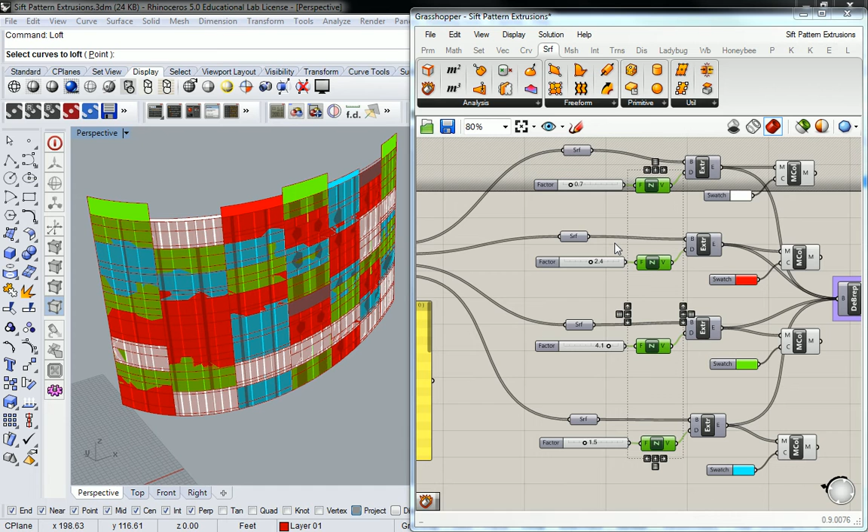All right, everyone. So our next task is going to be figuring out how do we change this angle to get it to extrude kind of outward from where it is. And most of you already sort of figured out the easy way of doing it, which is to just change the direction of the extrusion.

So this extrusion right here, we'll do just what Janet did here a second ago, and we're going to change it to unit. In my case, I'm going to do Y. It just depends which way your surface is facing. So I can just take one of these and go to each one, go down there, this goes up there.

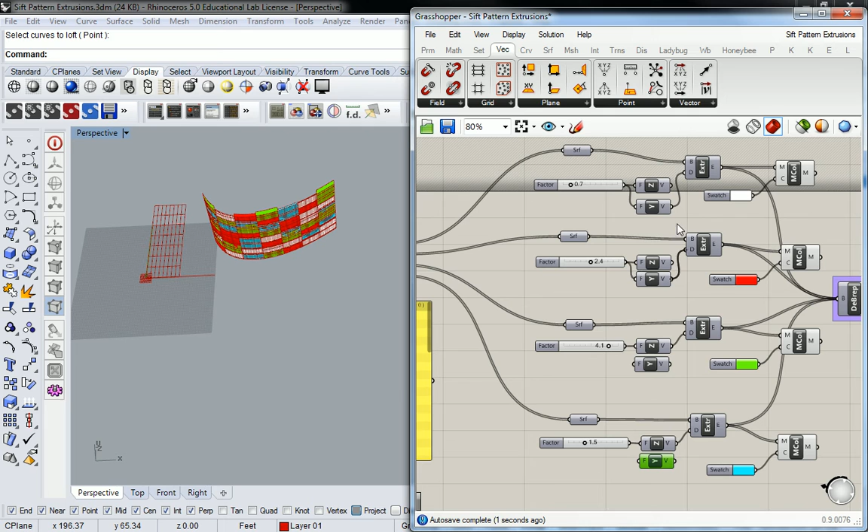Is there an easy way to replace those? This is the easiest way as far as I know. I wish I could just right-click and change it to be Y instead, but yeah. So that's Y.

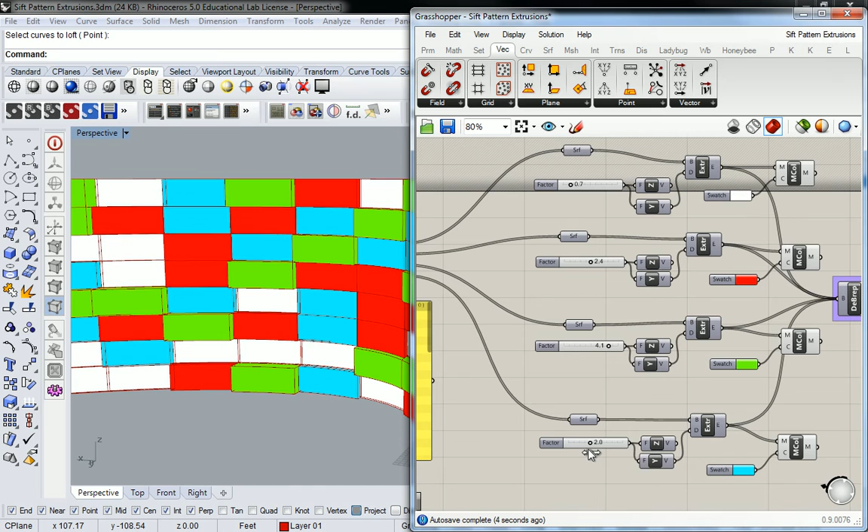And I can extrude these, make them more shallow, whatever you want to do with them. It's up to you. But the point I want to make is that while some of them are extruding kind of nicely, like I can see a pretty good amount of definition in these right here, some of them are not, like this one. It starts to taper off to be more of like a wedge shape, and that's not really what we want to do.

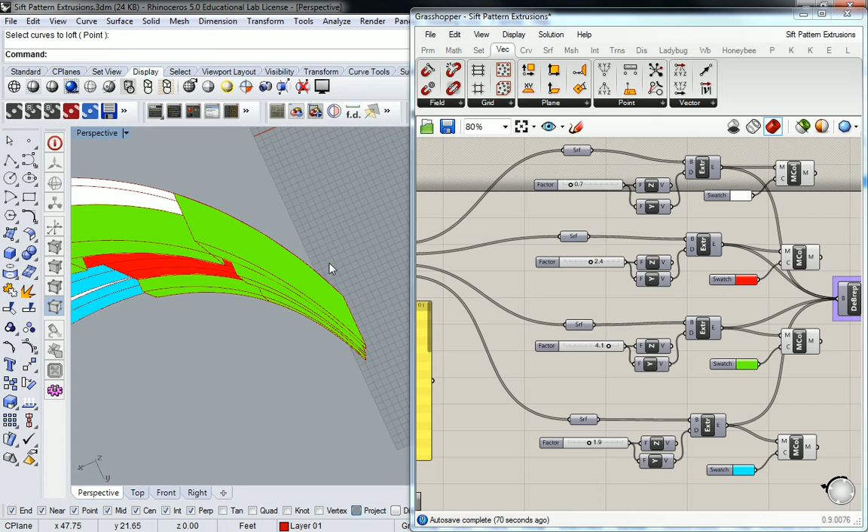Yeah. Okay, but we need to kind of rebuild it a little bit. We'll start by just using the actual surface itself in its curved form, and then we'll transition it to be a flattened form later on in the class. But let's start with just each one of these individual surfaces.

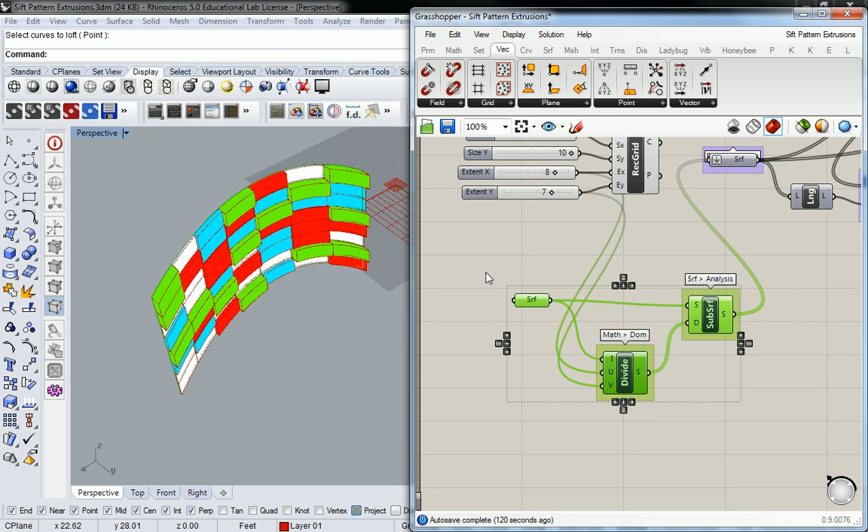We need to find the surface normal. And this was, like I mentioned, the Holy Trinity. When you're finding the surface normal, the names of the commands are not super intuitive. It's just kind of like this wiry mess of a bunch of things that you should probably just save, keep, and know. Eventually I'm going to show you how to make a custom component out of it, but I want you to practice building this a couple of times so that you really understand what's happening before we do that.

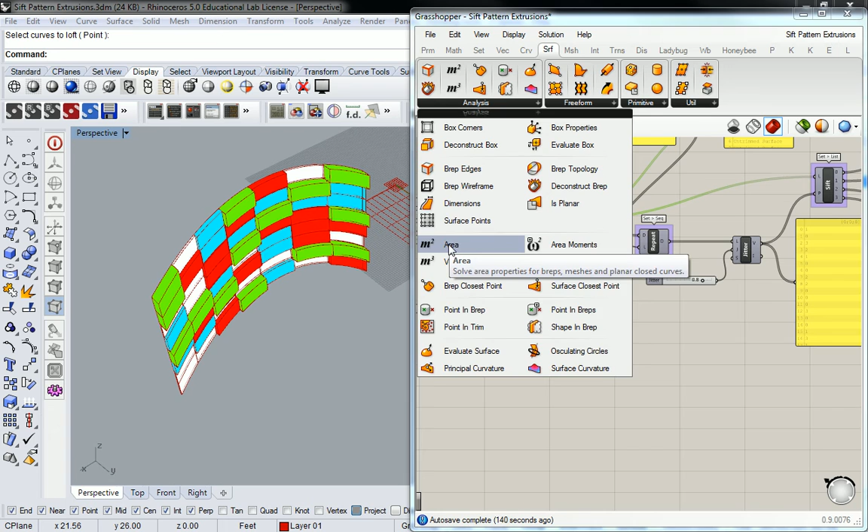Okay, let's do it together. To find a surface normal, you're going to operate off of each of the surfaces themselves. That's this one right here. You'll need to go into surface and analysis, and there are 3 components you need every time you need to do this. You're going to need area. And what area is going to do when you plug surface into that...

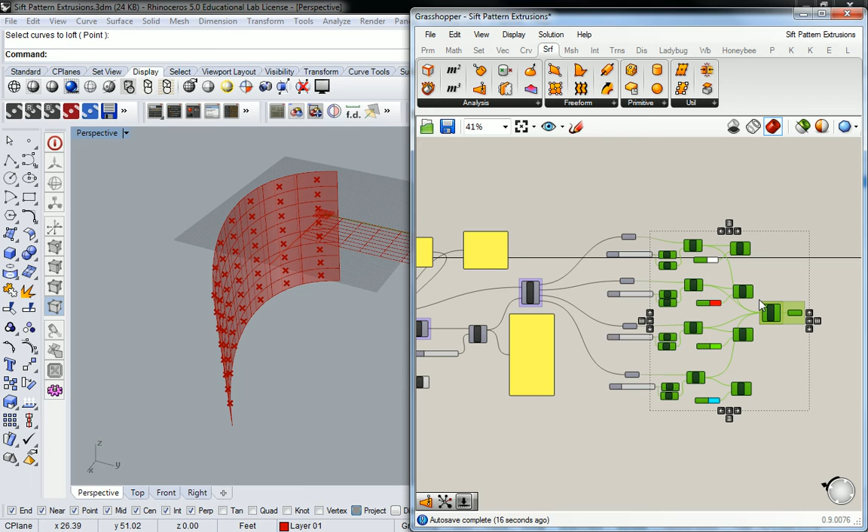Actually, let me hide these. Yeah, I'm going to hide those. Everything that's happening at the end, just hide them. I have a quick question — I didn't hear, so why did you change from unit Z to unit Y? I chose Y because X would have had everything extruding this way, and it wouldn't have been easy to see what's going on. So it's just how you make your curve.

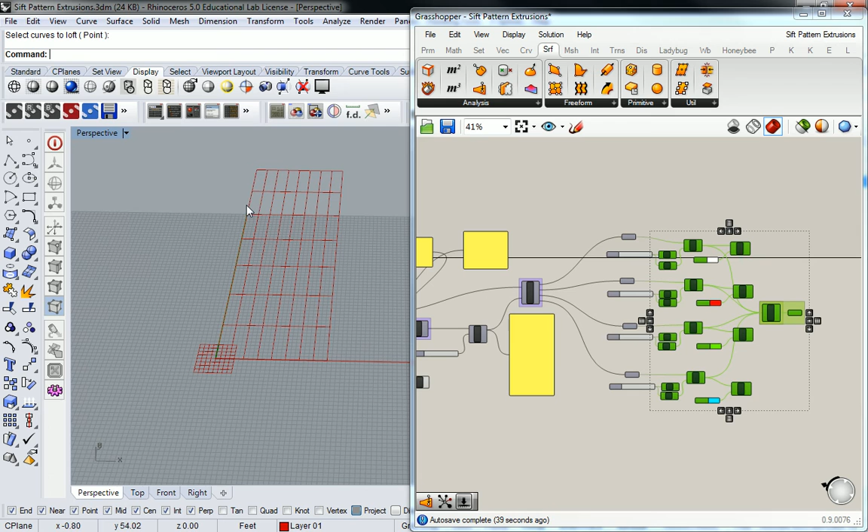Yeah, it depends which direction it's facing. Z is going to go up from the origin, X is going to go to the right, and Y is going to go 90 degrees from X. Can't say up anymore, but yeah. Does that make sense? Yeah. Can I just rotate my curve then and not have to change it? Yeah, you could do that too.

All right, so what does area do? It creates—well, its purpose is to calculate how much area there is in each of the surfaces that you plug into it. But it also calculates where the centroid is on that surface, because you need to find a centroid in order to find area sometimes, or at least it's a byproduct of finding the area. So that happens to live here.

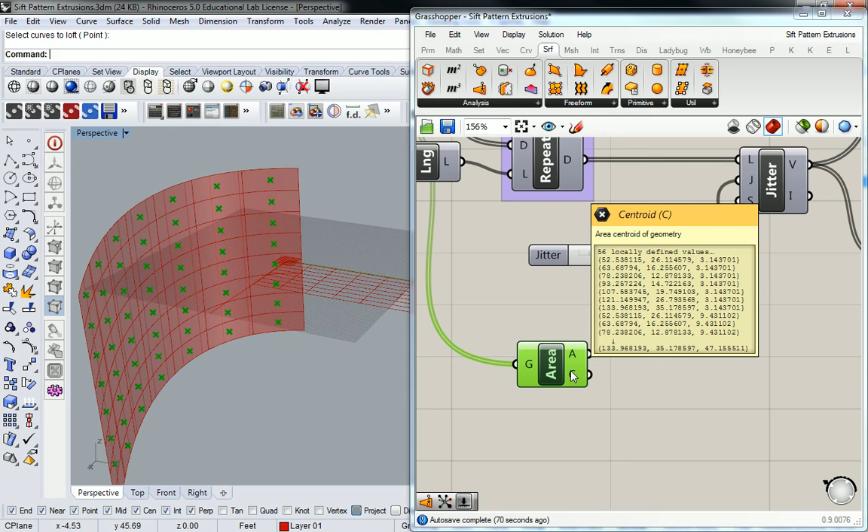I wish that there was just like a centroid command, but whatever, it's there. The other two we need are evaluate surface and surface closest point. I'm going to drop them both in here and then explain what's happening. All right, and this is the configuration I typically put them in.

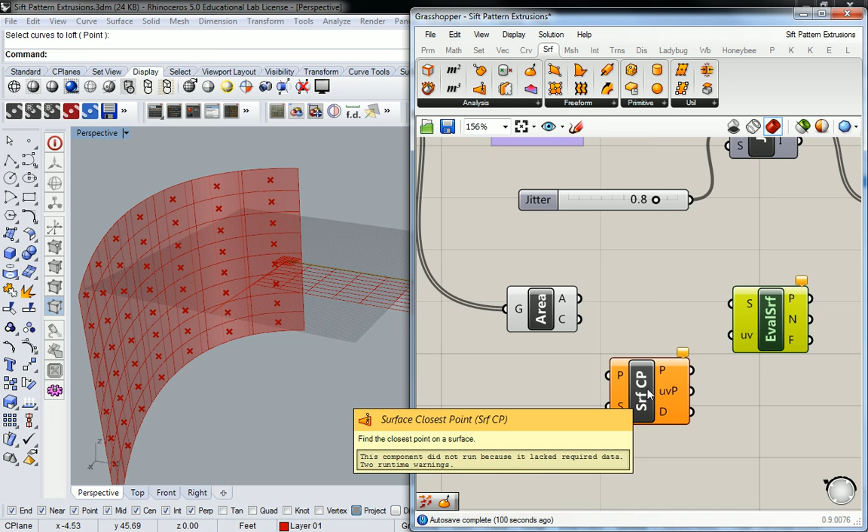So surface closest point, it says that it finds the closest point on a surface. It just so happens that this centroid already is coincident with that surface, so it's just passing that information along, saying this point to this surface. And so the centroid is going to plug into the point input, and then the surface is going to plug into the S input. It's getting a little messy right here on that surface output, huh?

I'm going to show you some shortcuts to clean that up too in a little bit. So now evaluate surface is—or rather I should go to the output here first. You don't have to worry too much about this. This is just passing more information out that kind of already exists, like the point itself. And then it could also measure the distance between the point and the surface, which in this case is pretty minuscule.

This won't always be exactly on the surface. You just kind of need to know that. It won't always be exactly on the surface. But the UVP, that's measuring where along the UV axis that point lives. Right? So that's like the XY of that warped surface. It's saying where is this point.

And that's because when I use evaluate surface, what it's going to do is—well, this says local surface properties at a UV coordinate. So this gives us the UV coordinate, and then we say I'm going to evaluate this surface at that UV coordinate so that I can get this information. And it's going to output—the point output is just passing along points again. The F output is for frames, otherwise known as planes. And then the N output is the normal vector. In this case, the vector only has direction, no magnitude.

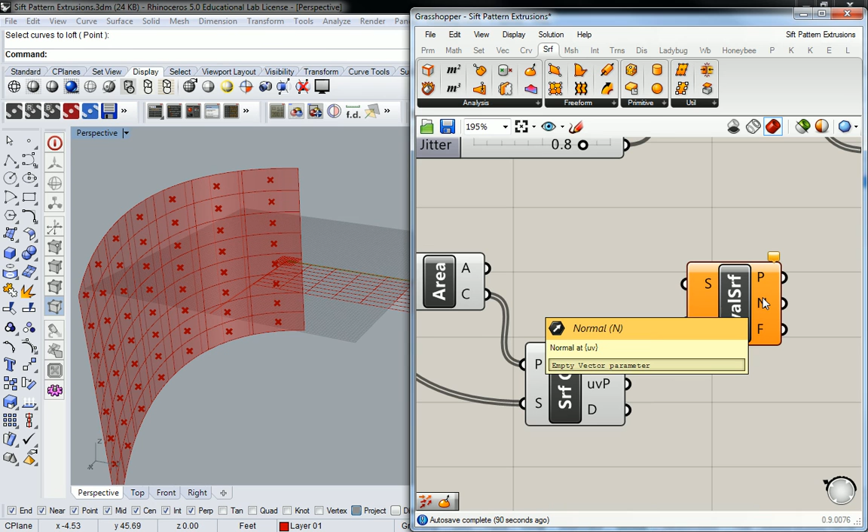But UVP gets plugged in here, and you probably could have guessed that surface is what gets plugged in there. And you're going to see these little frames show up. And now we have our normal vector to extrude along.

Okay, so I'm probably going to need to give you guys a minute or two to catch up before we go on, but I'm going to stop this video if there are no questions.